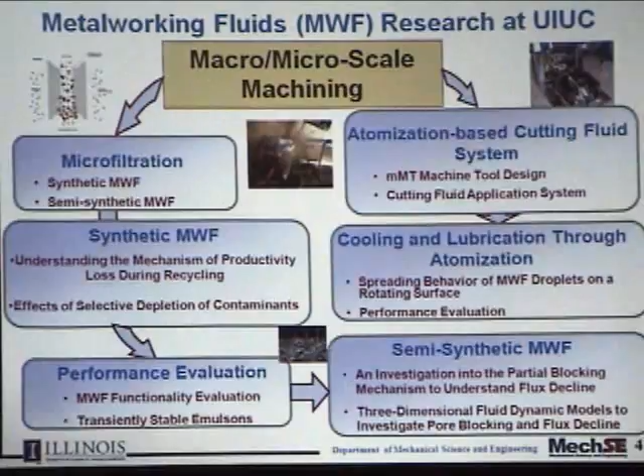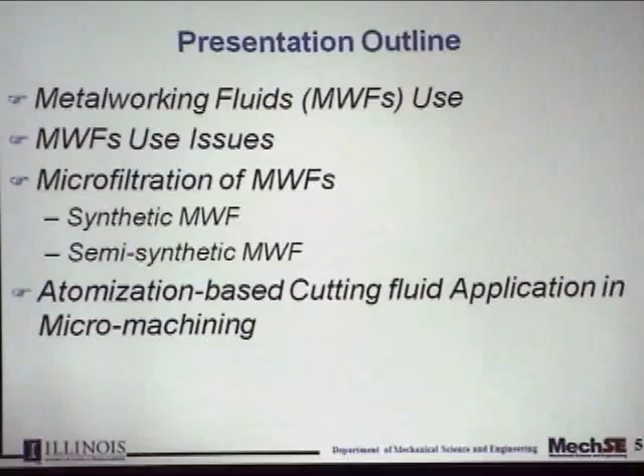So, the basic idea, let's see how much I can talk about with the given time. There's only 15 minutes left according to the time, and I have a lot of slides. But I'll try to see if we can skip and give you some overall progress.

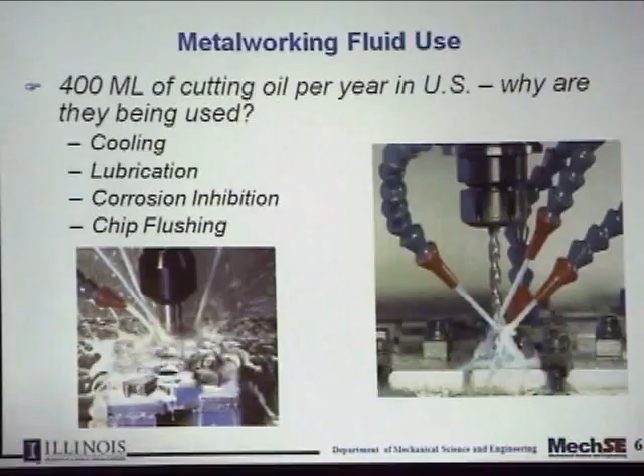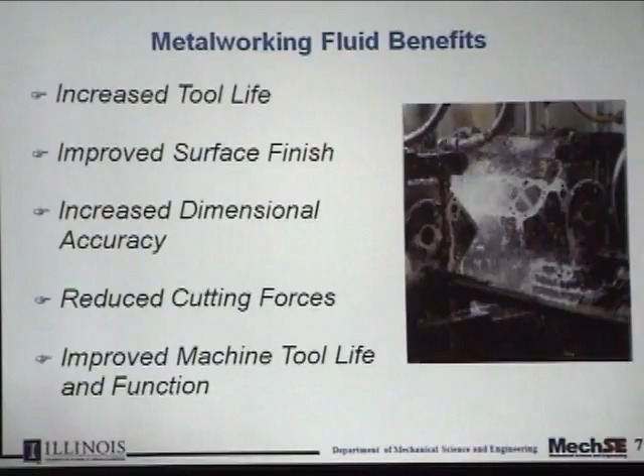Of course, a lot of you know about this. Metalworking fluid is used in machining for cooling as well as lubrication, not just lubrication or just cooling. And of course it is also used in chip flushing; high pressure jets are also used, different mechanisms of providing the fluids. The thing to note is that this is the way we do it in macro machining, large scale machining. But when you go to micro machining, these kinds of techniques won't work because the tools and the workpiece sizes are so tiny that a high pressure jet is not going to work. It will break the thing.

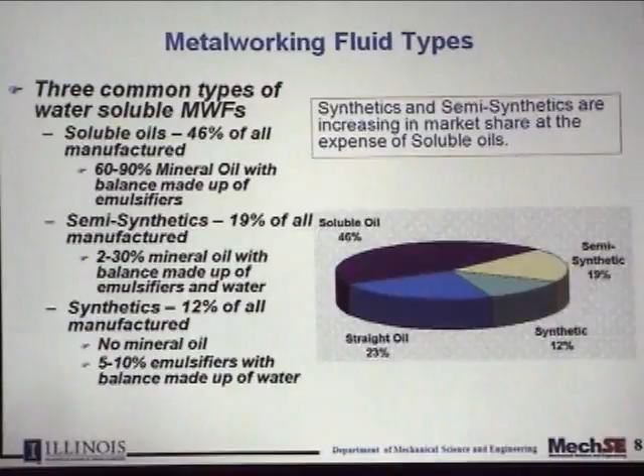Certainly the distribution of cutting fluid types, synthetics, semi-synthetics, oil-based, that's basically the statistics. That's what we got interested in, trying to understand a little bit about how these fluids can be recycled and how the microfiltration mechanism will work. Health hazards, I don't have to speak about this to this forum. All of you know that with metalworking fluid there are tremendous health and environmental issues, and that's why you probably saw some of the sponsors like Chrysler or UAW were interested in some of the work we were doing at that time, where they were having health issues, and of course anything you can do in recycling and filtration would be helpful.

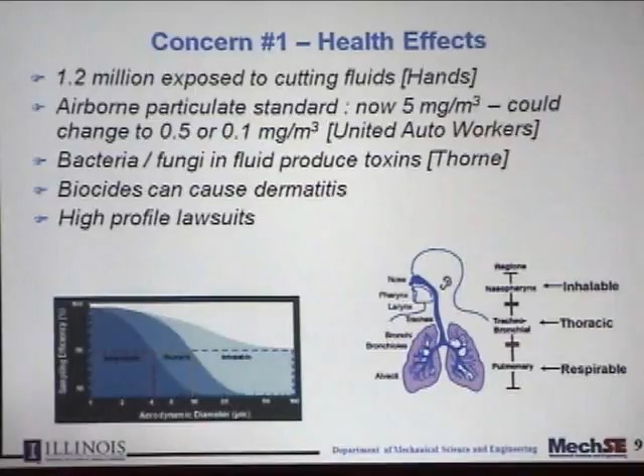Similarly, the other issues in environmental: you cannot deny the disposal of the cutting fluid is a big challenge. So therefore, recycling and filtration make a lot of sense.

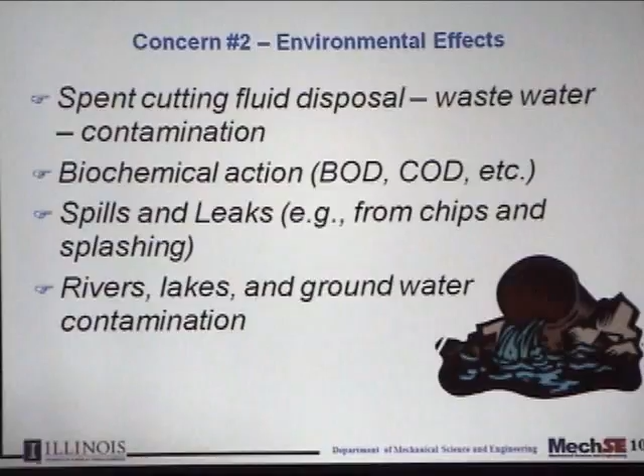And so, of course, there had been a compromise. We call it sometimes minimum quantity lubrication, micro lubrication. There are a number of ways people are trying to minimize the use of lubrication and cutting fluid to still get the performance, but that's one way of mitigating the issue.

The other issue is microfiltration, and this is what we learned from ISTC over the years, and felt that this is something that we should investigate and work a little bit more on. So that's what I'm focusing on, microfiltration a little bit.

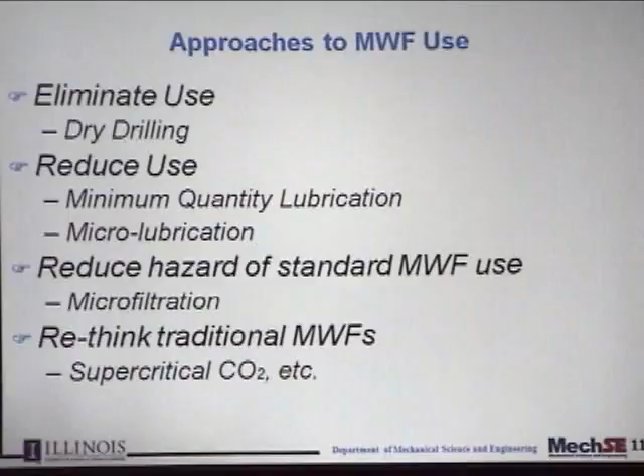So the goal is to reduce human health and environmental impact through fluid life extension. So this was the overall idea. Microfiltration, some of the basics, terminology: cross-flow, cross-flow velocity, transmembrane pressure, flux decline. That's what we're talking about, and that's the reason why we're studying it. One of the problems in microfiltration of cutting fluid is that flux declines over time, and therefore we need to see how we can design better fluids or design better filters.

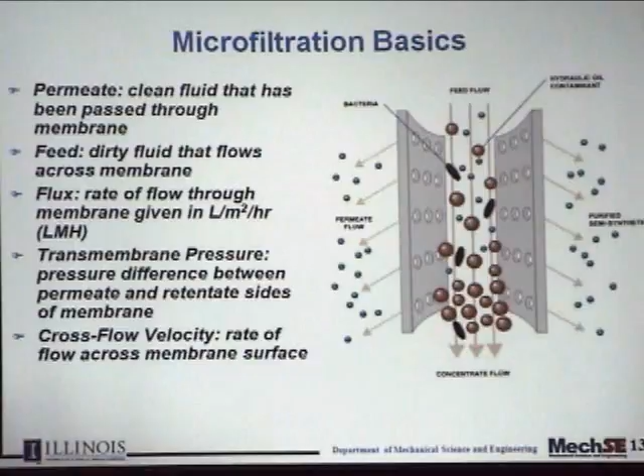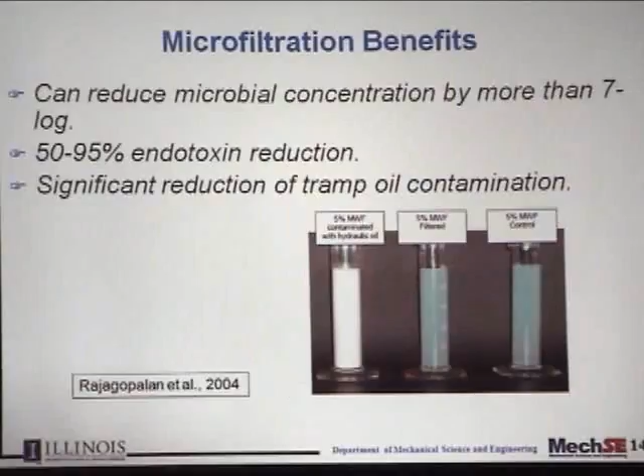This is a quote from Kishore again, a 2004 paper. It talks about reducing microbial concentration by more than 7 log using this kind of microfiltration technique. So it's a very powerful technique to use. But the point is, why are we still not using it? Because of the issues of fouling. So that's where we got interested.

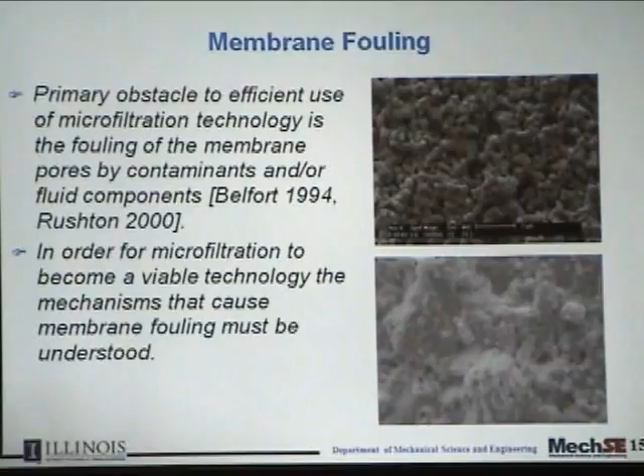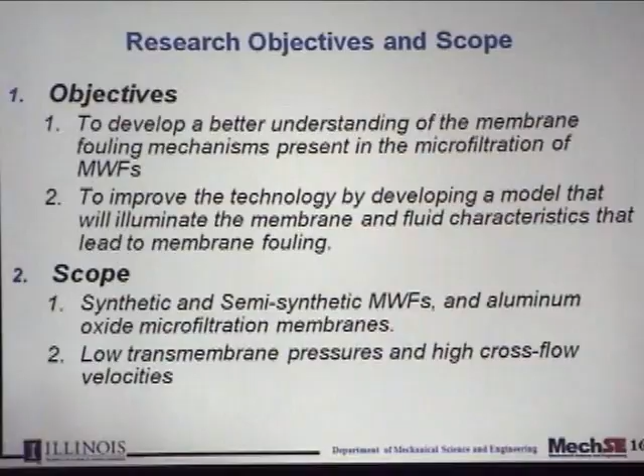What are the mechanisms of fouling? How can we study more about this and try to understand in which way these mechanisms of fouling take place? So the overall goal that we set up for this research agenda was to develop a better understanding of the membrane fouling mechanisms present in the filtration of metalworking fluids. And then, of course, we focus on synthetic and semi-synthetic.

So let me just give you a few slides on Steve's work. Steve essentially tried to use the basic fluid and see how fouling is taking place, what is happening. That was his curiosity to start with, and then he also used this idea of adding lubricant additives, defoamers, biocides: what happens if you add these in terms of filtration? What is the flux? Fouling takes place. So that's where he started doing some experimentation.

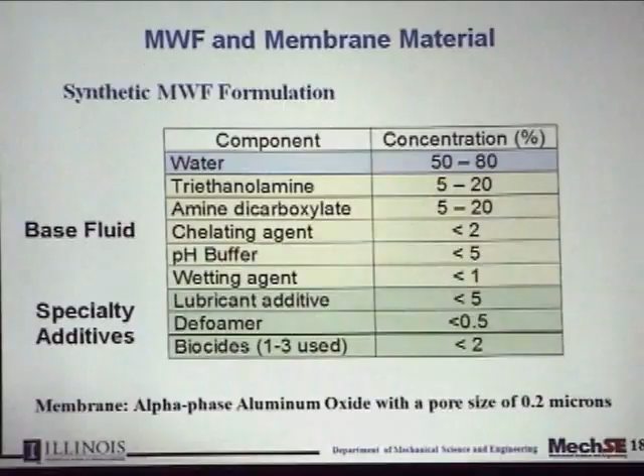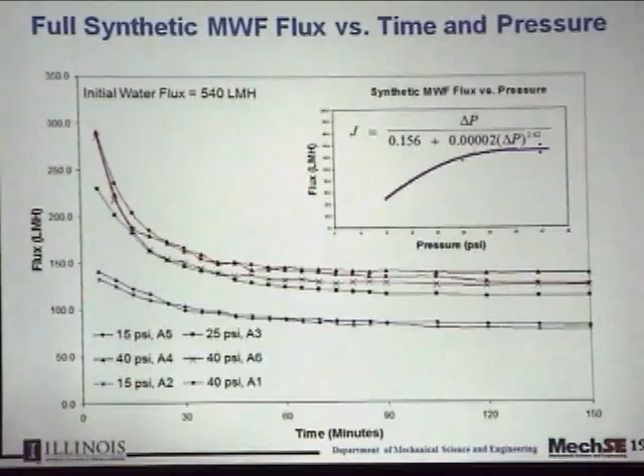And he found, the first slide just shows, that if you don't mix in all these additional outside ingredients, then flux decline is not that significant, in the sense that it's a steady state variation that doesn't block quite quickly. But then if you add lubricant or defoamer, you can see the decline is more rapid. And so that's what he's trying to show in this data.

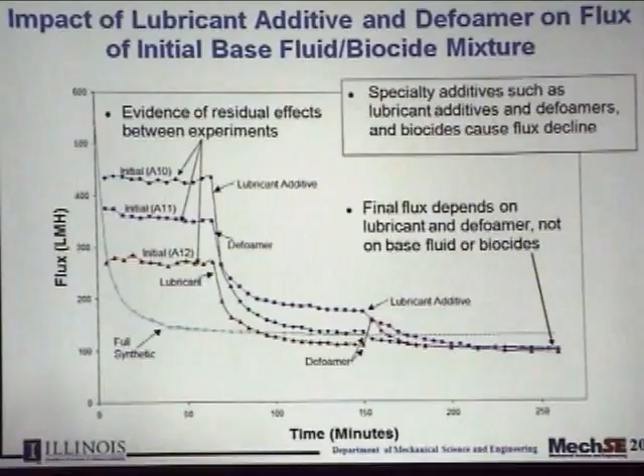And over time, you can see as soon as you add lubricant or defoamer, the flux decline is drastic. And so that's where he's trying to see what is happening, why it is happening, what is causing this fouling to take place. And then we started looking at the mechanism, understanding of this.

He also tried to understand a little bit about the concentration. If you change the original concentration, then what happens? And the conclusion was that minor concentration variation has a major impact on flux decline. So the concept here: he spent a lot of time really collecting this data, understanding that there is fouling taking place and these ingredients are really making it worse. So therefore, we've got to do something about it and understand it.

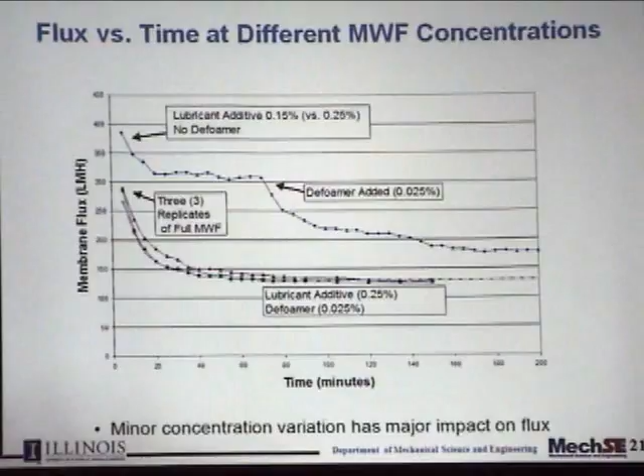So he essentially tried to look back and see what people have talked about, what kind of fouling is taking place: pore constriction, pore blocking and cake formation. And these are the kinds of ways blocking can take place for these membranes.

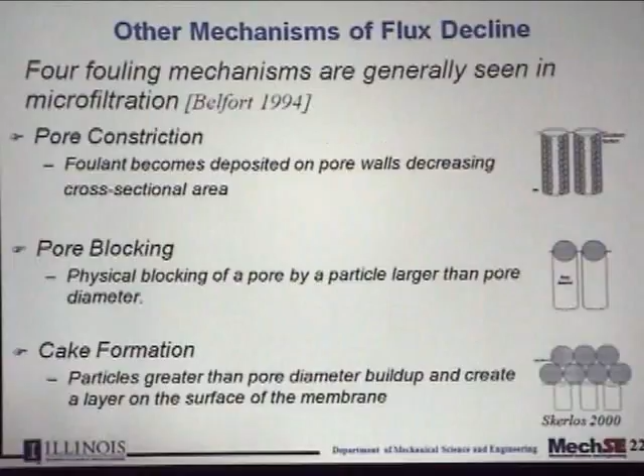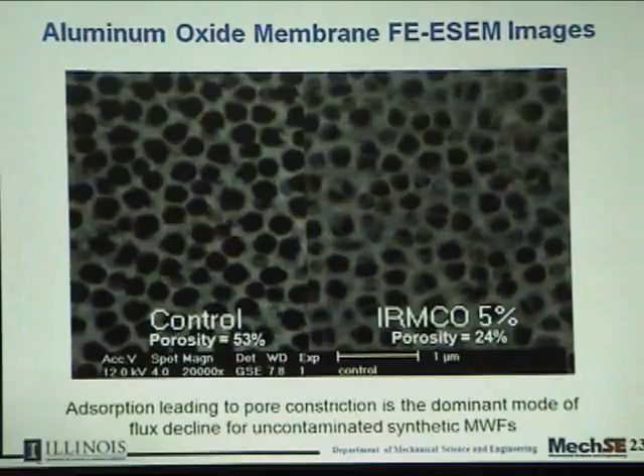And in trying to look at what is happening in his case, he went back and looked at these membranes, observed them on the SEM images, and tried to see what mechanism is causing this. So here's an example where he tried to show that with the aluminum oxide membrane, these field emission environmental SEM images are used for non-conducting membranes and material, so that you can see fresh versus when you have a little bit of this thing. Adsorption could be leading to pore constriction, which is the dominant mode of flux decline, in uncontaminated synthetic metalworking fluid.

But if you start looking at what he was doing in the experiment, he was cleaning these membranes and then performing the test again and again. Every time he was cleaning it with different water pH values, and he found out that there was always a residual effect from the way he was cleaning. Clearly, the slide shows that when you clean with water with pH of 5.5 versus 10.5, the lubricant is still sitting on the membrane after cleaning when you have a higher pH value. The lubricant is not washed away. So that is a problem.

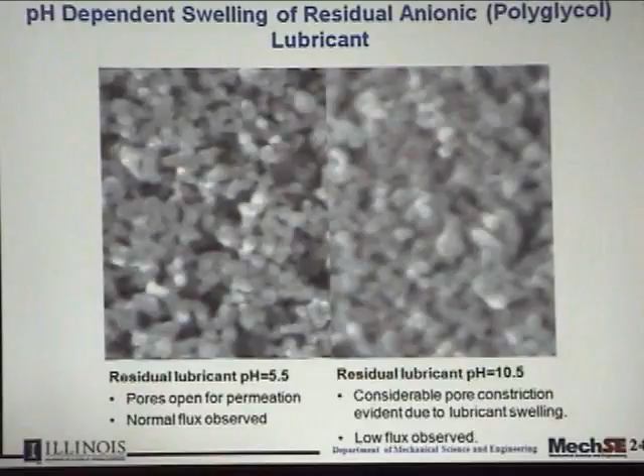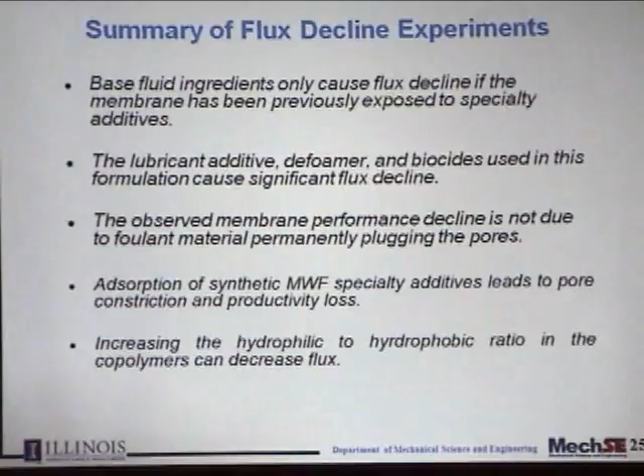Then John came and he started looking at semi-synthetic metalworking fluid, and he restarted this with the idea: let's see what happens to fouling with this kind of metalworking fluid, and is there a mechanism of fouling which we can understand a little better. And his goal was not to stop there, but to go ahead and see whether we can develop a model so that we can design a better filter or a better fluid.

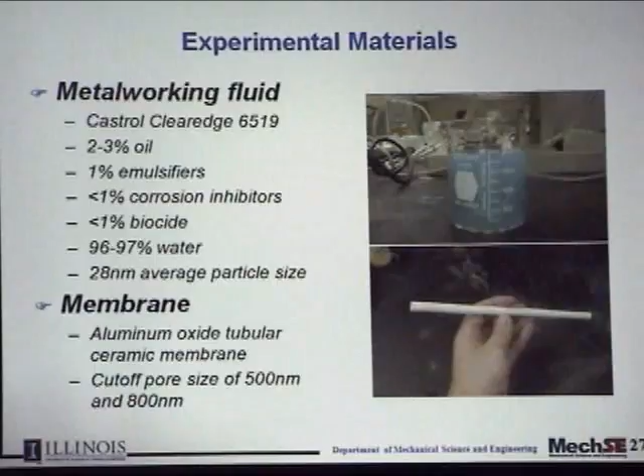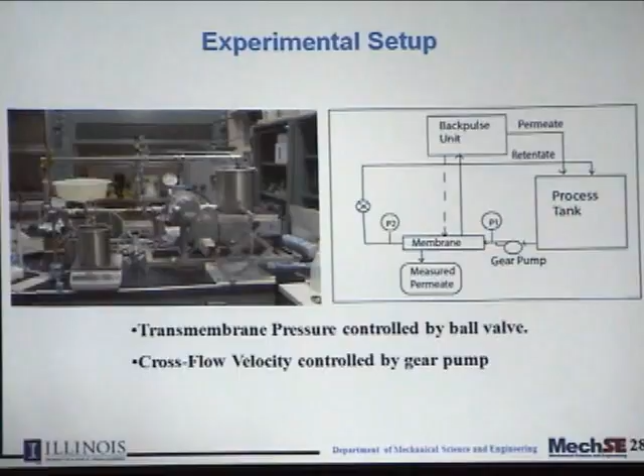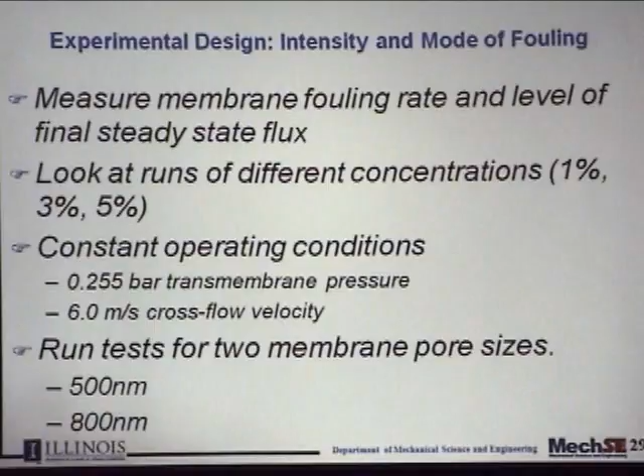So he started the experiment again, built the setup, and did some initial experiments just to see this fouling. Here are some of the statistics on the membranes, for example, 500 nanometer and 800 nanometer, two pore sizes investigated in the experiment. This setup actually sits here in this lab. That's where he performed the experiment, varied some parameters, and collected data. He ran just two membranes with constant operating conditions and so on. Let me show you the data here.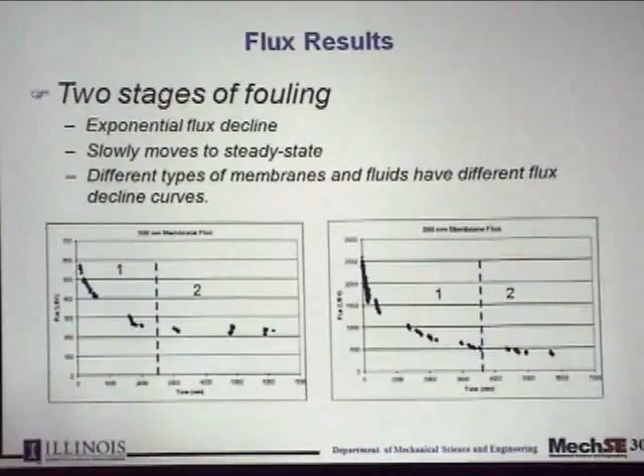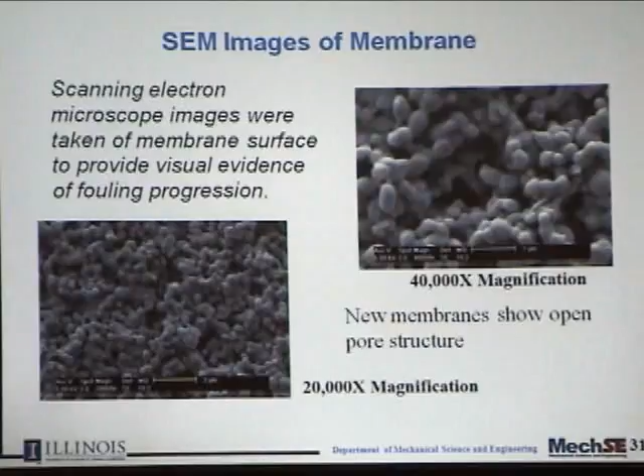So he again looked at the SEM images of these membranes. This is a fresh membrane at different magnifications, and you clearly see all open pores. But if you look at the clogged membrane, you start seeing these aggregates form, and they start blocking. You can assume that these aggregates block the pores, and therefore pore blocking is taking place.

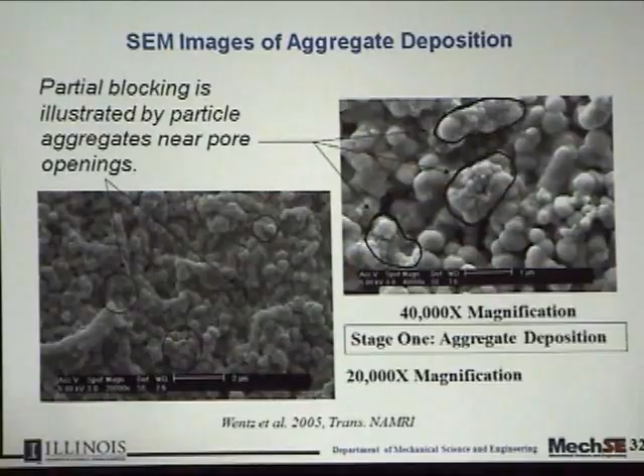But sometimes these aggregates are not big enough. The pore size could be bigger, and they can go inside and hinder the flow and partially block it. That's where he started looking at partial blocking phenomena. He also found that sometimes these aggregates are washed away by the pressure and velocity, and therefore the pores become unblocked. So he started looking at these things, and this is another image of different aggregates blocking.

So he kind of concluded from the basic experiment that aggregates are being formed: initial pore constriction and partial blocking due to aggregate deposition, pore blocking due to the formation of an aggregate layer on the membrane, and then aggregates large enough to totally block the pores, or basically they go there and partially block it.

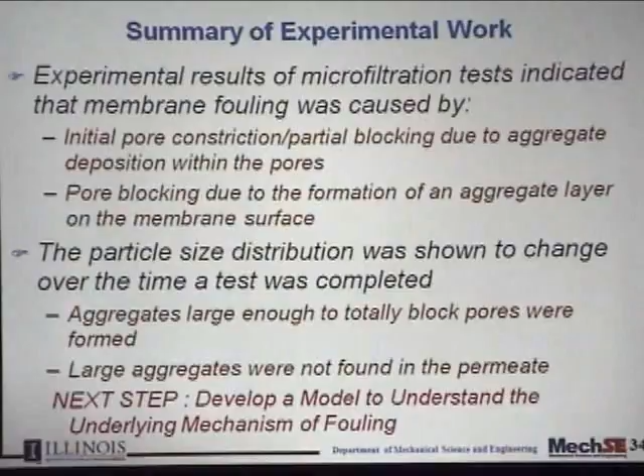And he started thinking about how do I really take this physical process which I observe, model it, and then hopefully simulate it. So that's where he got into his work, and he took the cross section of the actual membrane, because when you look at the literature, people have tried to do some of the work, but they always assume very simple geometry, and the actual membrane is not that way. So what John did is he took the cross section and tried to mimic as close as possible what the pore geometry is, and then he modeled that part and tried to understand this blocking. In this slide, he's showing complete blocking, and this is the partial blocking concept.

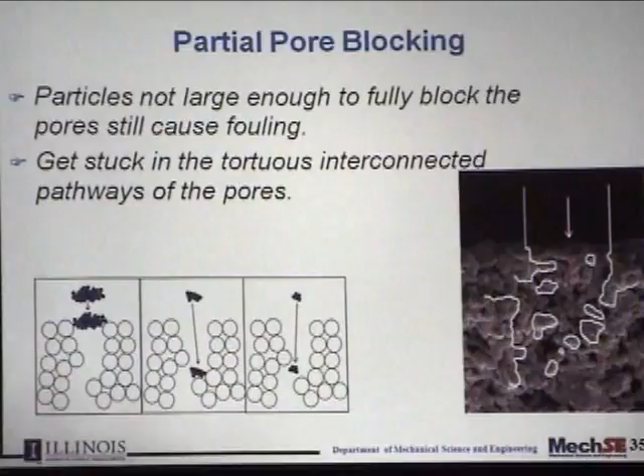And then he developed a simulation. What you see here is the kind of geometry he's trying to model, a small section of the membrane. And then he's trying to see, when the thing starts, what the blocking is and how this thing will take place. So this is the kind of simulation we started doing.

It's a 2D simulation to start with, so you can always say that these membranes are 3D membranes. So how do you really calculate the flux? And that's a very difficult thing to do until you make some assumptions about it. But John essentially focused on the 2D aspect of it and tried to understand exactly how the flow takes place, where the blocking takes place, and so on. And he did a lot of simulation.

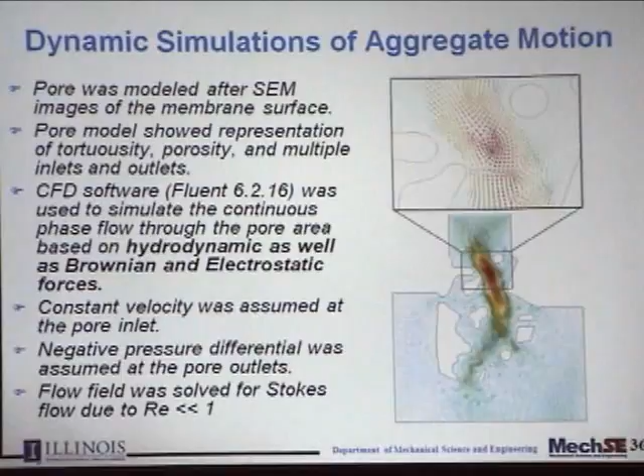Then the other fellow came. John, when he did this, used only hydrodynamic forces; from the top to the bottom the flow is taking place through hydrodynamic forces. But when you're talking about such a small particle size, there are other forces coming into play. And that's where this fellow came and said: hydrodynamic forces, Brownian motion forces, electrostatic forces. At that scale, these forces can change the path of the particles as they move from top to bottom, so these things have to be modeled also. So this fellow started enhancing the model, adding these forces, and trying to see the effect of that.

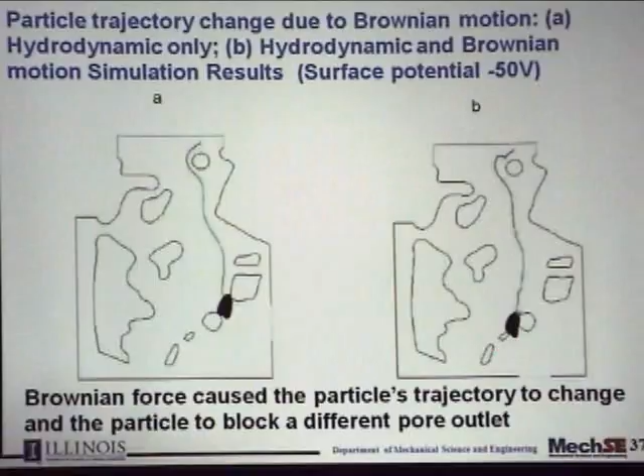So you see here, this is John's model, and then when you have the other models like Brownian, you can see the phenomena is different. Brownian forces really impact the flow of these particles. So the blocking is taking place in different locations; different pores are blocked. Similarly, he also looked at hydrodynamic and electrostatic forces.

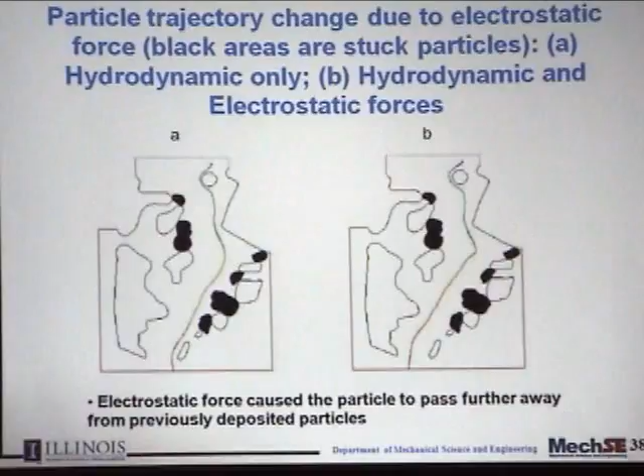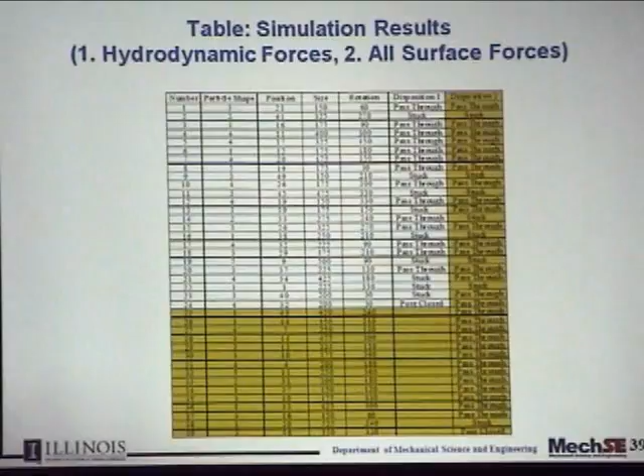Then this fellow went on and said, I can simulate this whole progression. Over time, you can see which pores are being blocked as particles move in. It's a very interesting scenario. The whole simulation starts from the top, and then you can see the particles coming in and blocking different pores. What this number shows is the particles blocking the pores. So here this pore is blocked, and this pore is blocked. Now this pore is blocked.

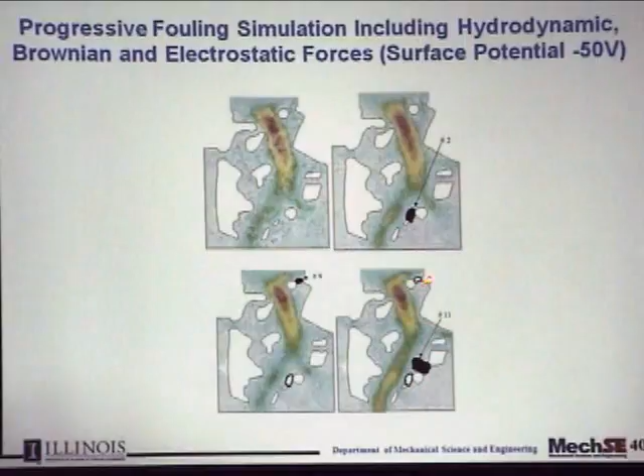And if you move on further, you see finally after some time this whole thing is blocked. There's no way this thing can move on. This is the last one, and when this got blocked, the whole thing is completely blocked. So the point is that through the model you can simulate it and understand what's going on. Now, of course, I can change pore size. I can study different particle size distributions. I can take different properties, different surface potential.

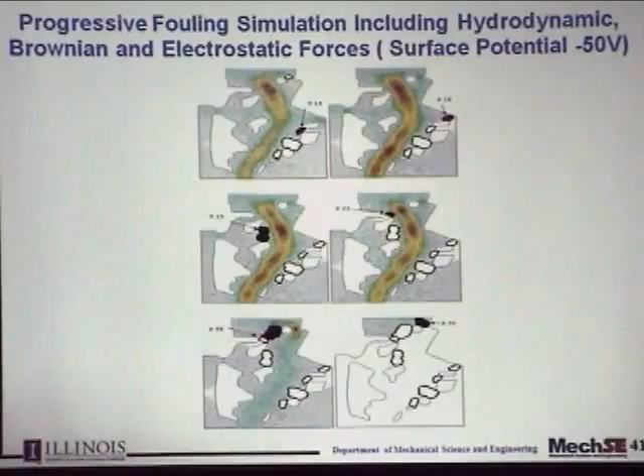I can change all these things to try to understand the effect of these parameters, so that I can design a better membrane. That was the basic concept of why we are trying to model and study. In fact, this fellow went on, because as I said, to simulate flux you need a 3D model. So he started looking at the 3D simulation now, and he started approximating the membrane, just to start with.

A lot more work is to be done, but this is still active. The preliminary work about a month ago was trying to show that you can do 3D modeling and simulate the flux decline, and then he predicted flux decline using this 3D model. So now the model can realistically start doing the flux decline curve prediction. So now we know what is happening.

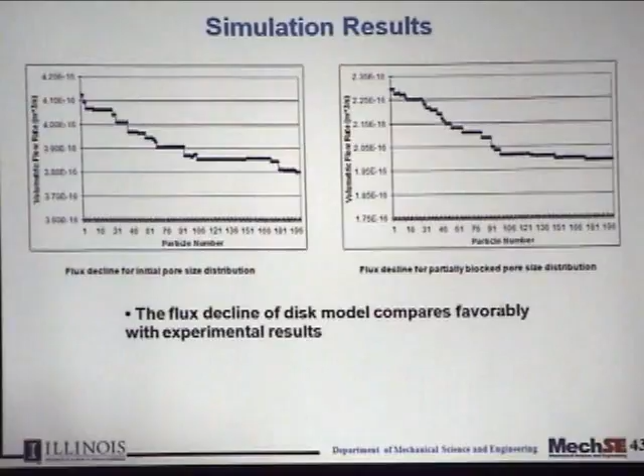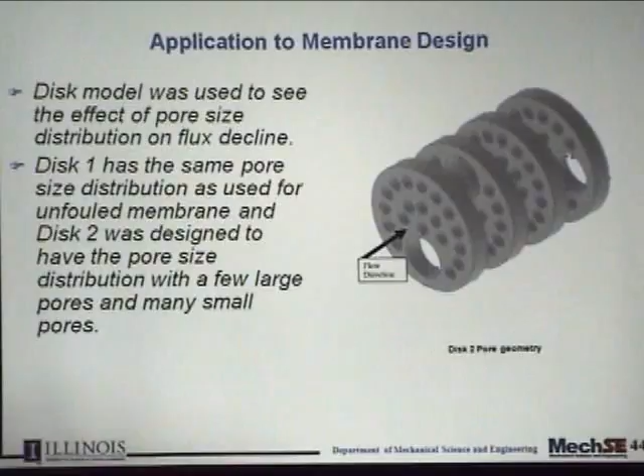So just for curiosity, we said, okay, let's design different membrane geometry, different pores. So he has different models here where he changed the pore size distribution. Here is a large pore and then a small pore. So these two simulations have different pore geometry. That means now you are designing the membrane with a different pore size distribution. If you do that, then you can study the effect on the flux. In one case, flux decline is faster than the other one.

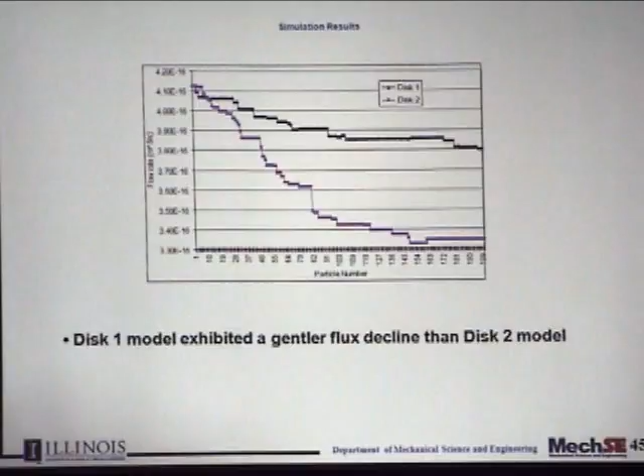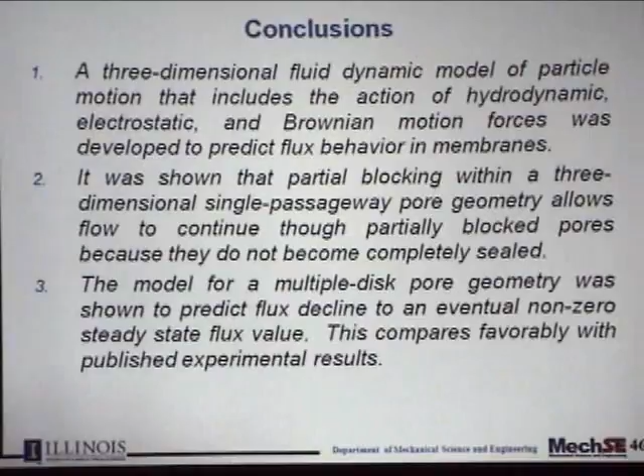So this is just demonstrating the point that through the model I can study different designs, and I can study different cutting fluids and so on. So that's where this work is concluded. There's still ongoing work right now. We just got a separate grant to continue to look at this aspect and see if we can design better metalworking fluid and membrane.

If you allow me, just a few minutes, not too much, okay? Just 5 minutes maximum, to introduce this problem of micro machining.

So miniaturization is everywhere these days. I remember the hearing aid used to be such a big thing, put in the back, everybody could see. Today, people wearing hearing aids, you can't even see them. There are about 15, 16 tiny components in the hearing aid. So the smaller you can make it, the more acceptable it is. So a lot of micro parts are being made. A lot of manufacturing is being done at a micro scale.

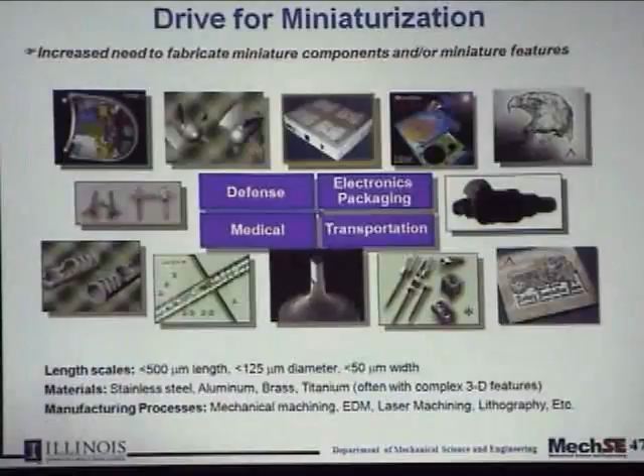So when you start looking at that, you can start visualizing. When we talk about micro and micron, the diameter of your hair is 70 micron, and we are talking about machining sometimes less than 70 micron, a measurement smaller than the hair. That is the scale we're talking about. Still not nano; it's micro scale machining.

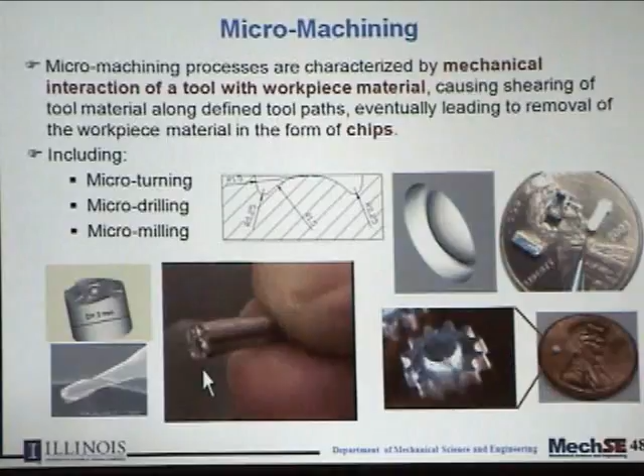So this is a gear. You can see how this gear sits on the penny. This is the size of the part we're talking about, making features of different scales. This is the hearing aid part. So the idea here is that you do micro machining, making small parts. Then the question is, what about the machine? You can, of course, use a big machine to make a small part, but it doesn't make much sense. So we started building our own machine.

This is our first generation machine we built in our lab. The fellows who built this machine started a company 5 years ago in Chicago, and they're doing very well. They started with 2 people, 2 students here who did masters, and now they have about 14 people in 5 years. So they are making machines. This is the first machine they built.

So the machine is very tiny, as you can see here, it's about 180 by 180 by 300 millimeters in size. So you can lift the machine and take it. The whole idea is that you can build a whole factory on your desktop. That's the basic goal for people these days in this area. So micro machining comes into play. Let me go back to the slide here.

So here if you observe, this is the spindle, and here is the workpiece. The workpiece is very tiny, and the tool is anywhere between 50 micron to 500 micron. That is the range we're talking about. And 50 micron is smaller than the size of the hair. Hair is usually 70 micron. So these cutting tools are available.

People are making these tools. Somehow, however they are making it, they're making it. And the idea is that now the cutting tool is coming close to the workpiece. There's practically no room for cutting fluid to get inside, in between the tool and the workpiece. The space is so tiny. When you provide the cutting fluid, one drop of the fluid could be even thicker than the space we've got.

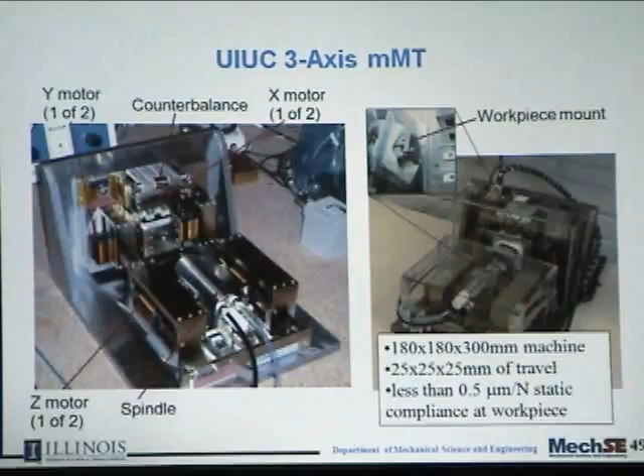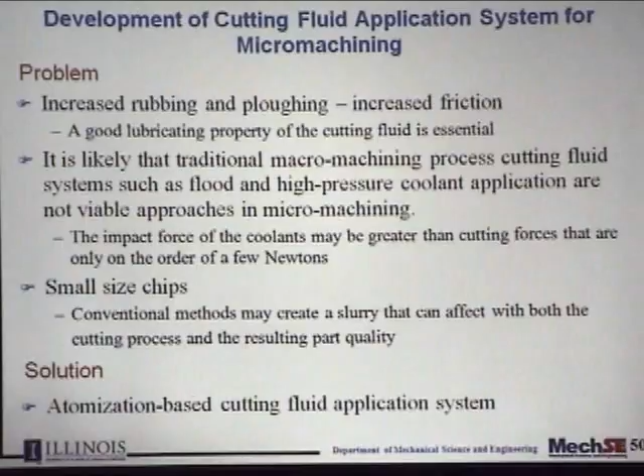We started looking into this problem. One of the ways we started thinking about, of course, we know the fuel injection system in automobiles, people use this idea of atomizing. So you can atomize the cutting fluid and have atomized droplets. The droplets could be small, 5 to 10 micron, and you could put them there. Then the challenge is that when you inject the droplets on the surface, because they're so tiny, they will not necessarily go there and slide there. They can bounce back.

So the mechanism is like this: the drop can stick, rebound, spray, or splash. So when you're putting these atomized droplets from the spray nozzle on the surface, anything can happen. Our goal would be to have a spray that can go into the interface between the tool and work. Only then can we see the effect of the lubrication. Otherwise, it's not going to help. So that is the biggest question.

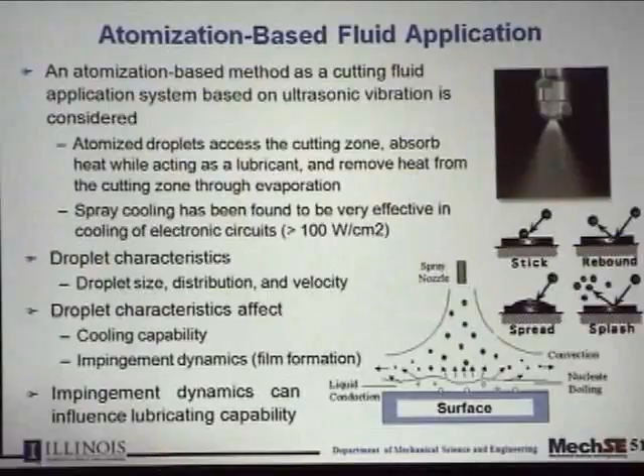Dynamics becomes an important research issue for us to figure out. What should be the droplet velocity? What should be the droplet size? What should be the orientation? And of course, the cutting fluid itself. What kind of surface tension? What kind of viscosity? What other physical properties should we have? So that is what we are trying to study.

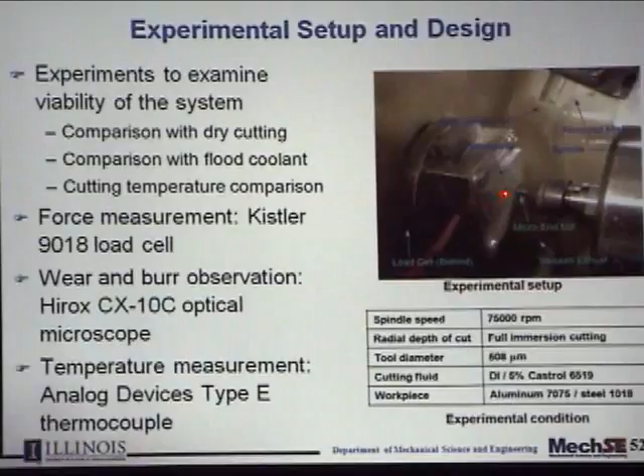We did some preliminary experiments. In fact, we just bought a humidifier, like a nebulizer basically, and used that nebulizer to start atomizing the cutting fluid, trying to produce droplets and see whether there's an effect or not. So this is the initial experiment you see here. This is the tool, the workpiece, and we developed a system where the nozzle spray comes in here. And we tried to study the effect of this atomized spray.

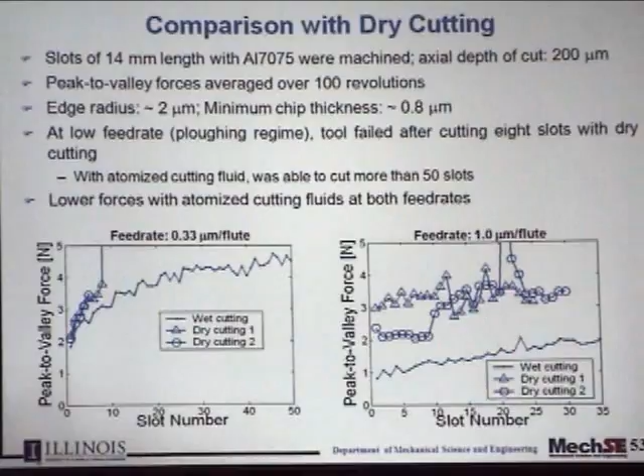We found that this data shows that when we're dry cutting, the tool broke right here after cutting about eight slots. When we have wet cutting, meaning we provide the atomized spray, it just keeps going. We could cut 50 slots and the tool didn't break or wear out. So you can see the different effects of cutting fluid atomized spray under different conditions.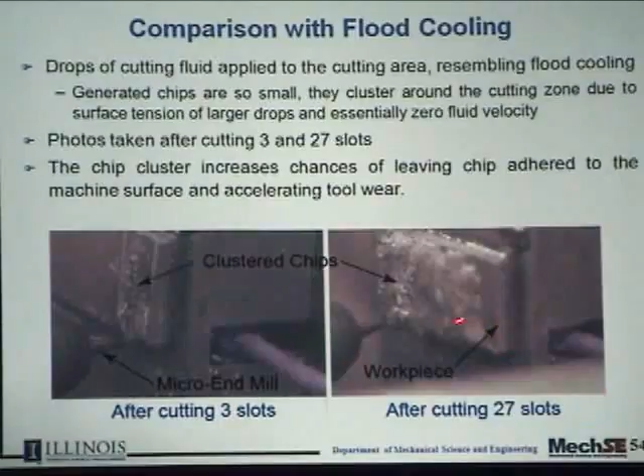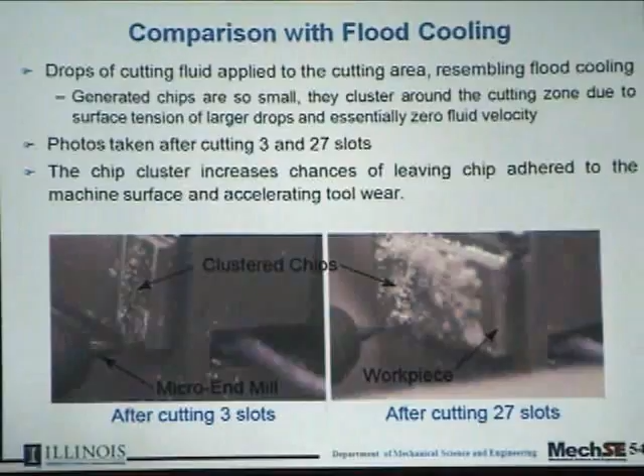Somebody suggested, why do you have to do this? Just submerge the whole thing in cutting fluid. Well, the problem is, we did something like this, and the chips coming out of micromachining are just like dust particles. You can see how the dust adheres to the surface when you have lubricant. This picture shows that after 3 slots, chips start getting onto the surface. After 27 slots, all the chips are on the surface. You can't even see the original surface. So that's where this is right now.

We're doing a lot of work in this area to understand how to provide metalworking fluid when machining micro scale parts. So just to summarize the challenges, we started looking at a 3-dimensional fluid dynamic model to simulate the whole microfiltration phenomenon and understand the fouling. We are also looking at how we can redesign membranes and reformulate cutting fluid, and you can complicate it more by looking at porous media simulation, and of course more on the micromachining side.

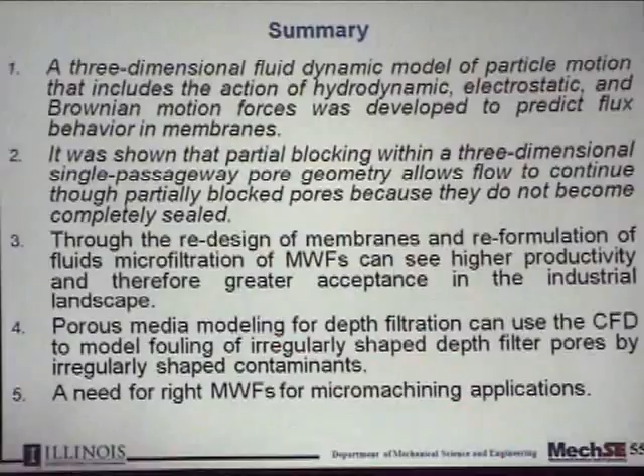I'll conclude here with this very quick summary. There's a lot of work going on. I can't cover 11 years of work in 15, 20 minutes.